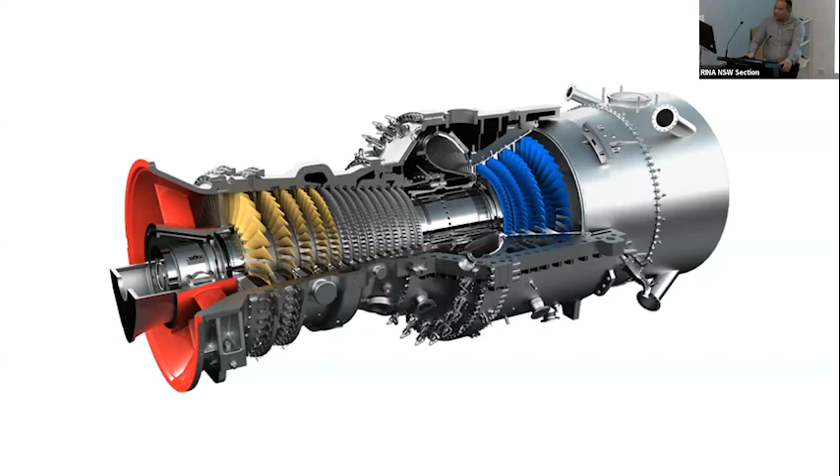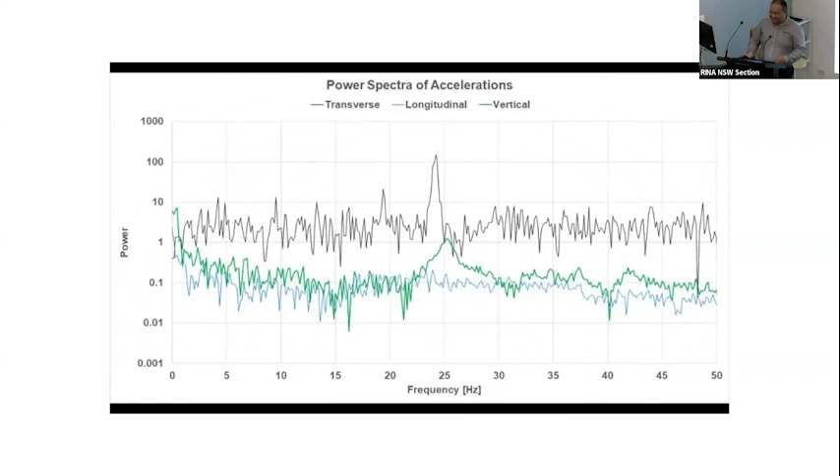Unfortunately, or fortunately as well, I had to come back to work. So I joined Baker and Provan, starting as a project engineer.

Now, put up your hands if you have heard of Baker and Provan before. Oh, you don't have to pretend, but more than half - that's good.

We identify ourselves as mainly a manufacturing company. We offer fabrication and CNC machining, and mechanical and hydraulic fitting and assembly.

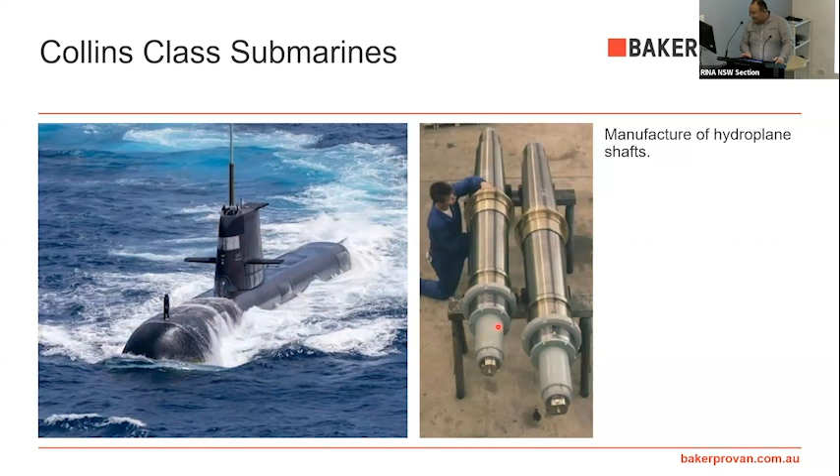Anyway, in the future we will keep supporting the fleet. For instance, the Hunter class program, we'll be doing that through partnerships with the Type 26 OEMs. We know the Hunter class is based on Type 26. Baker Provan will be heavily involved in the manufacturing of gantry cranes, deck cranes, doors, hatches, and scuttles, etc.

And besides manufacturing, we also carry out a lot of service work on the DDGs, the LSDs, and the AORs.

Now, tonight I'm going to present you with 3 examples from my day-to-day work and show you the kind of issues we come across. There are safety device pressure settings, a bolted connection, and some hydraulic pipe replacement.

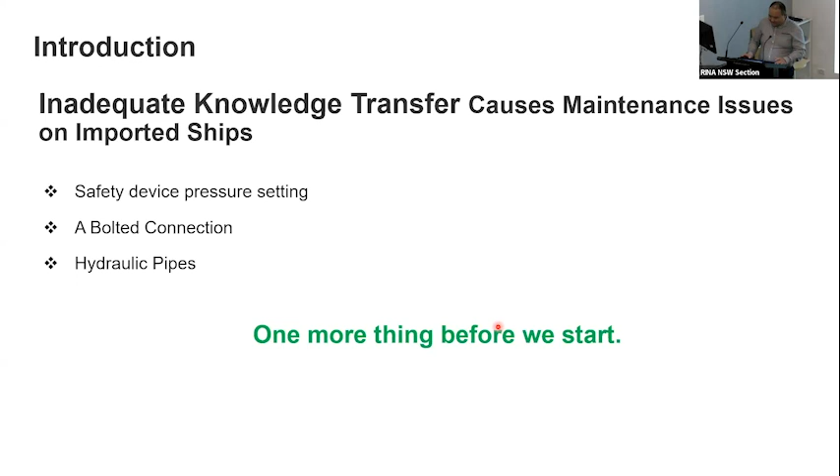But before that, there's one more thing I decided to add to this presentation, probably in the last couple of days. This is a phone app called Spectrum View, developed by Oxford Wave Research. Have you guys heard about that before?

The reason why I'd like to share this with you is because of a recent experience. This app can display a real-time spectrogram and a spectral analyzer view. I started using it when I was doing advanced vibration engineering.

So let me tell you the story. There are 3 recordings from my phone, from left to right, chronologically. If you look at each of the graphs, on the horizontal axis, that's time in seconds. The vertical axis is the frequency in hertz, and the color is the noise level in decibels. Red means it's loud, and blue means it's quiet.

Starting with the first one - I was doing a cold machine inspection, so nothing's running. Took up my phone and saw that. So I know there's a pump running, about 50 meters away, and I recognize this frequency being a multiple of that - you can see the dots. But that one looks rather odd to me, because I was not expecting another frequency just below that.

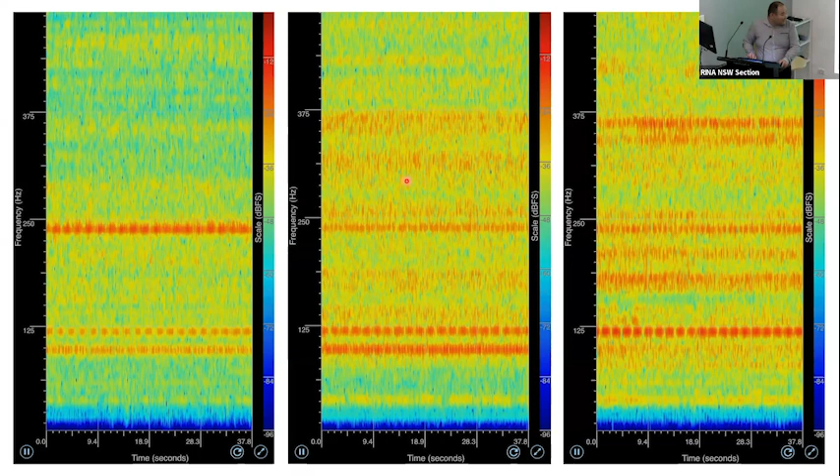So I walked towards the noise. When I hear the noise, I walk towards it. So that's the difference between 50 meters away and 5 meters away. As you can see, these get louder - the closer, the louder - so it's more red than this one. And also you can see these relatively higher pitch noises from 5 meters away that don't quite make their way to 50 meters away.

Obviously, that's a frequency that does exist. Then I walked even closer, went downstairs towards the pump, and discovered a cover plate with loose screws on it - so it's a loose plate. Once I had someone tighten up the plate, that frequency was gone.

It's so fascinating that with the help of sound, we're 50 meters away, out of sight, on a different level - I could see something's wrong, went there, and found that plate and tightened up the screws. That's why I'd like to share this experience with you. It's so easy, it's a free app, and so easy to have an extra dimension in our everyday work and discover problems that otherwise went hidden. Because just by listening at the start, my ear wouldn't really tell any difference, but the spectrogram does tell - there's some other frequencies there.

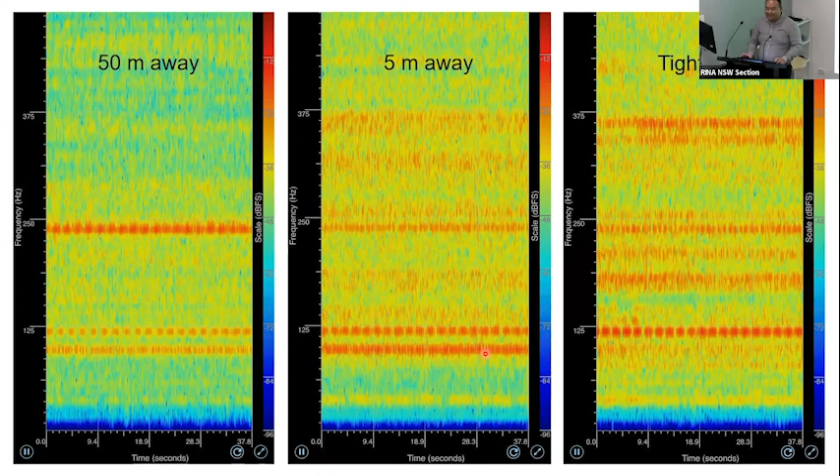Anyway, finally, let's get back to the topic. So first example - this is a typical hydraulic schematic for a winch. This here is a safety device. For simplicity of this presentation, let's disregard that pilot line and consider this being a direct acting relief valve. So it's something like that - it's got a little orifice there, closed by that poppet, and then pushed down by that spring.

As you can imagine, when pressure keeps building up here, it will overcome the spring and then release the pressure. So the further you wind down the knob, the larger the force from the spring and higher pressure required to overcome and relieve it. That's how you adjust the relief pressure.

So in this, let's say on the winch, you put 100 kilos on the hook and then somehow release the brake. The load would like to drop, so it would like to turn this motor and build up pressure here. These are hydraulic flows, sorry. So you can imagine when pressure is building up here, it will want to overcome that spring.

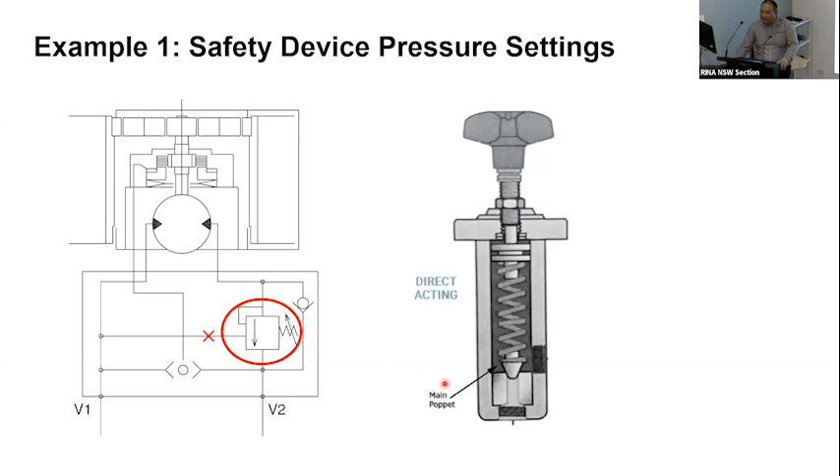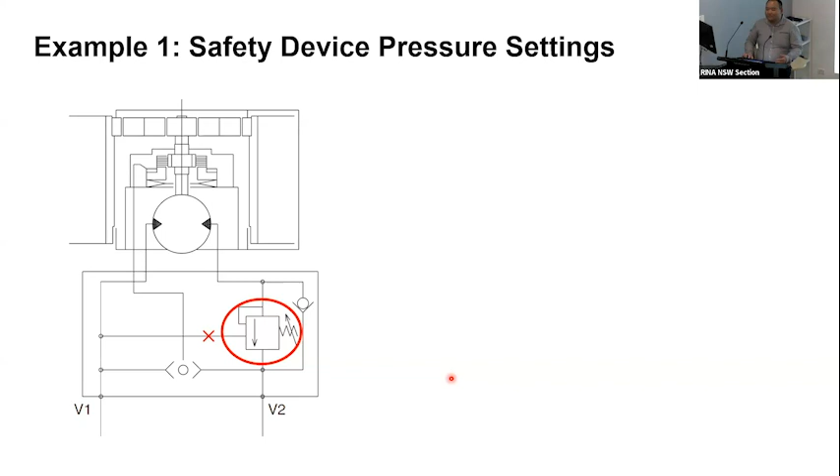So in this scenario, we were given this winch from the customer to overhaul. That's fine, we've been doing this for many years, we're quite familiar with that. But as we were finishing up, we realized we should look at the manufacturer's instructions on what pressure we should be setting for safe operation. And that's what they say on the manual.

For a moment, you would think you could read Italian.

This is the Italian manual's English equivalent: we're not going to tell you the pressure, so don't do it yourself. We are confident to clean everything and put it together, but without that piece of information, we're not confident it can be operated safely. This kind of information should have been passed on when they delivered the equipment, rather than us finding this out when we have to overhaul it. That's exactly what they wanted, I guess.

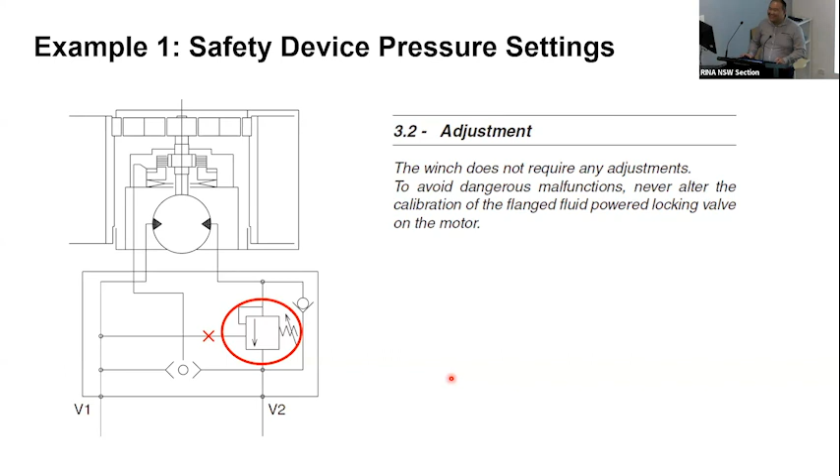Okay, now the second example. The first one is rather simple - we just need to make a phone call or write an email saying, hey, what's the pressure, can you please tell us? And most of the time they're quite helpful about that. So that's the maintenance manual - there's no data sheet, they don't tell the actual number, so we have to chase it up. But that was easy enough, from the good Italian folks.

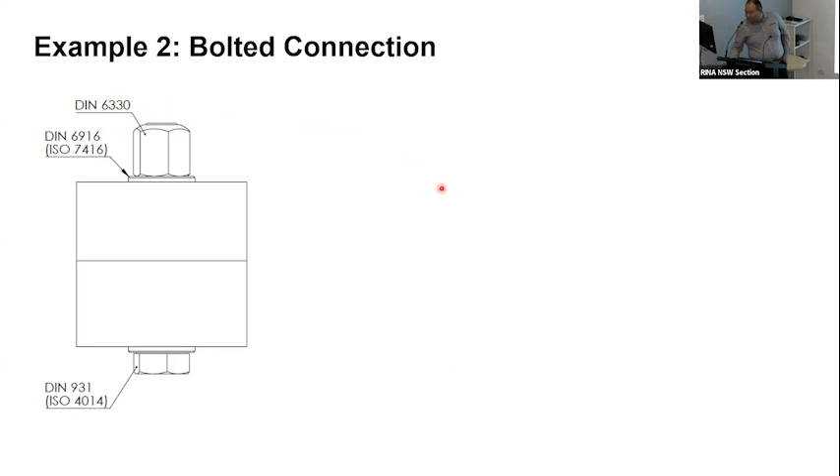There's another example. This is a bolted connection you find on the superstructure of a certain ship. They're just a regular bolted connection, torqued up to 1,500 Newton meters. The only difference is that on some of these bolts, there's a superstructure flange on a frame right up against it, but that's not a problem in this instance.

We found these bolts in real life to be rather corroded. So we reported that to the OEM, and obviously they recommended these to be replaced. So let's have a look at what the descriptions from the OEM say about these parts.

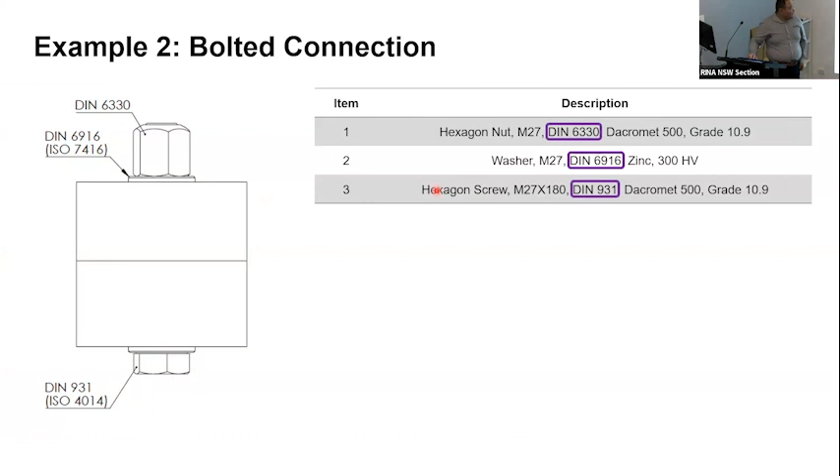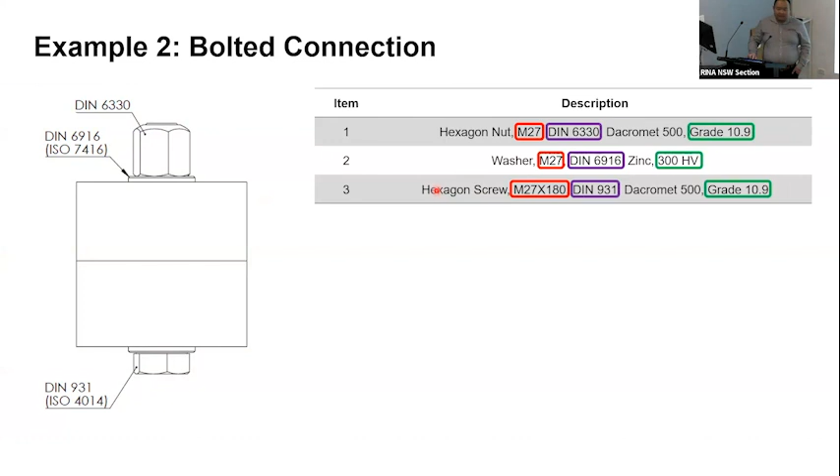Firstly, their relevant DIN standards tell us what they are. Their size is M27, not very common, but it should be okay. Grade 10.9, that's what you'd expect for structural bolting. And the coating is Dacromet 500 - essentially a zinc flaking process rated to 500 hours of saltwater spray. Now, the keywords - it appears we have enough information to identify what they are, what size they are, what coating there needs to be, and what grade they are. So it looks like we have all the information we need to replace these.

But if you look at the DIN 6330, that's not common - we don't use it here in Australia, or at least it's not what I've used. When we try to find it, it's very hard - we have to get it from Spain. That takes 8 weeks minimum, and with a very big price tag, because it has to be air freighted in.

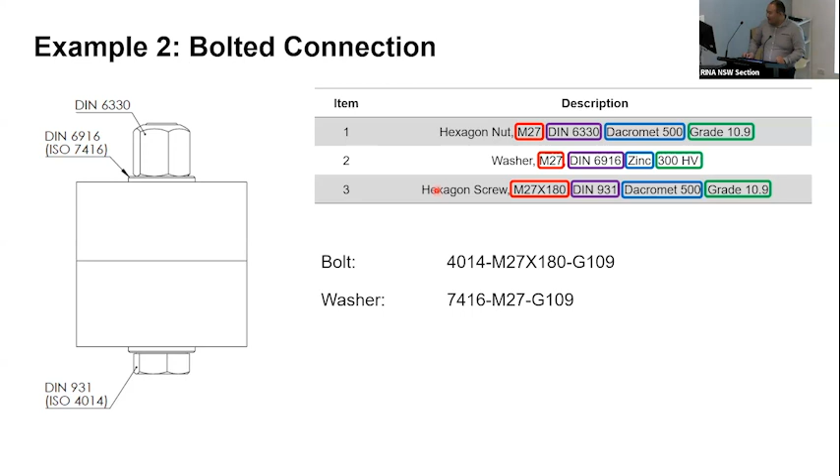But let's think about this. Let's do a comparison between a DIN 6330 and ISO 4032, which is the most common standard hex nut we find pretty much everywhere. The main difference you can see is the 6330 is thicker - that's about 1.5 D, whereas the 4032 is approximately 0.8 D, where D is the major diameter of the thread.

So let's see. According to ISO 898 Part 1 2013, the proof load for the bolt is 381 kilonewtons, and the proof load for the standard nut is 486.5 kilonewtons. So that means the weakest link here is the bolt. By using a thicker nut, it's not going to increase the load bearing capacity because it's limited by the bolt itself.

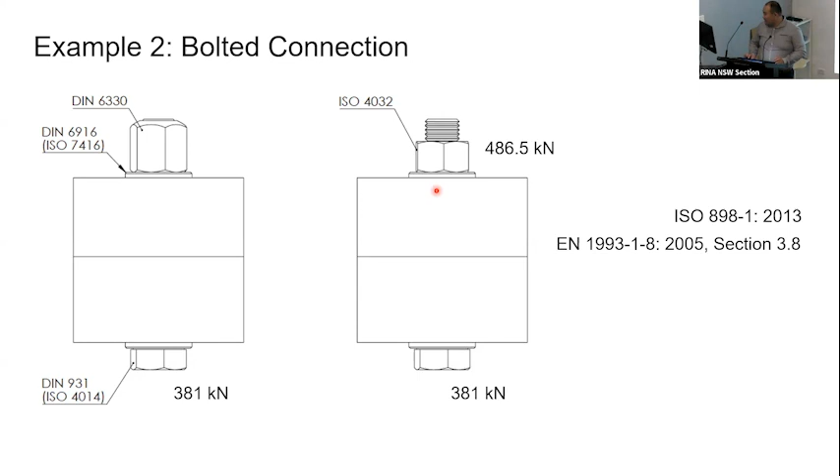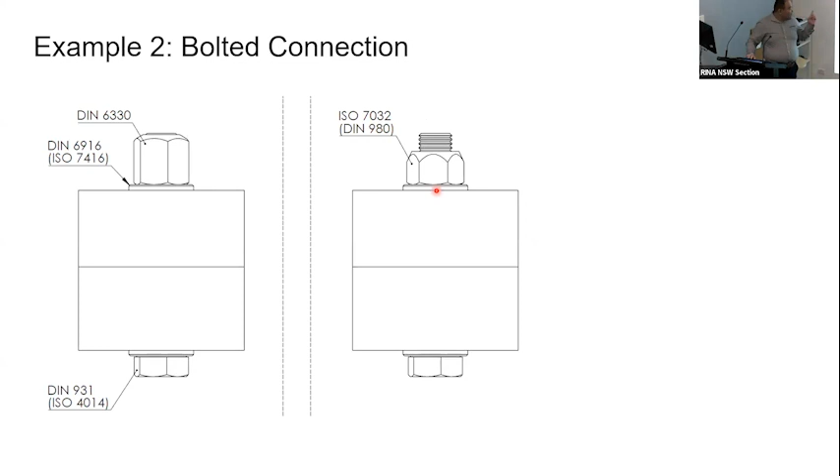So going back and forth a few times, they eventually approved our proposal to use the ISO 7032, which is widely used in Australia. We actually use it quite often for our jobs for Sydney trains. Other projects use it as well. In that context, it's known as the DIN 980.

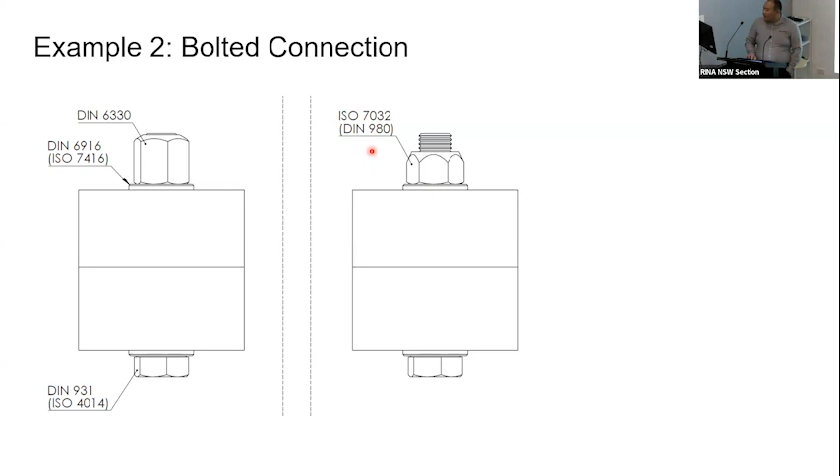If you're using the name ship, you then have to get an engineering change approval to change the design of the nut. Yes, so we do that through the OEM. We'd prefer getting their approval, but we have very good communication with them, so normally we can hold meetings, or if we send them an inquiry this arvo, we typically get a reply overnight. So there's no issue with that.

So what are the benefits? Since we can source them locally now, we reduce the lead time from more than 8 weeks to a week or two, and really reliably. Reduced cost too, because the airfare is probably $1,000.

Better performance, because the 6330 relies on more thread engagements, so you have more friction, whereas the 7032 has a little metal insert under there, and it's got a pressed thread on it, providing a much more robust locking mechanism.

And also there's a bonus - we can use shorter bolts. There used to be a thing called good engineering practice, which always used to state that you had 3 clear threads protruding from the nut - that's what you got there. I think if we do it to scale, we'll be saving about 10 millimeters of length. So we'd buy shorter bolts, which is probably cheaper too, and lighter, so the boat can go faster.

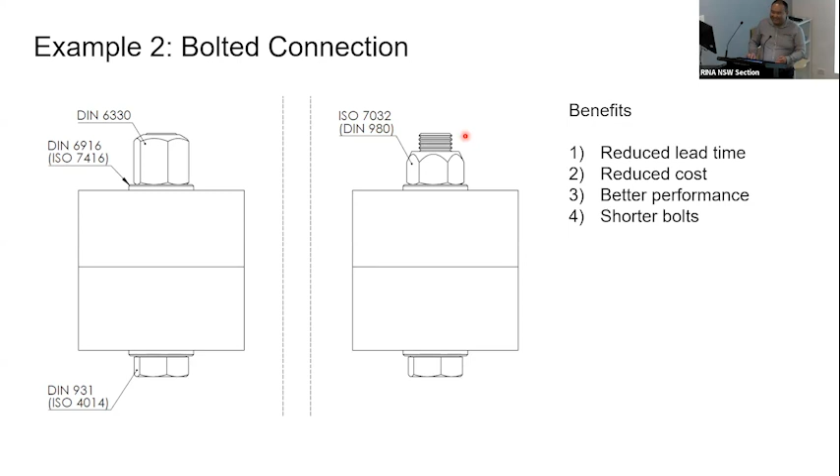Had we done this in the manufacturing process, we wouldn't have had to squeeze this last-minute engineering review and change into a very short maintenance period. That was the takeaway from that example.

Next one, hydraulic pipes. This was from one of my inspections - I had to climb up the ladder, have a look, and the wall thickness is about 4 millimeters on those, and the corrosion is more than 1 millimeter thick. So, not surprisingly, we have to make new pipes to replace them.

The new pipes must be produced by a Lloyd's certified mill with the rated pressure on the certificate. They must have equivalent material property and the same sizes.

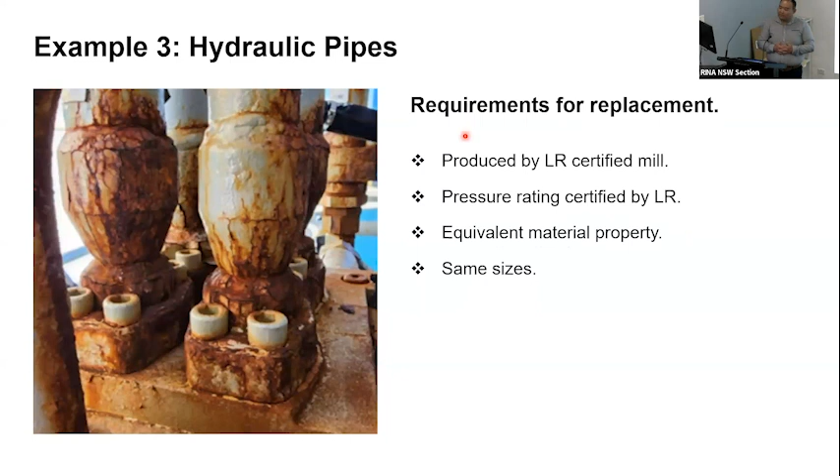So let's first have a look at the material. Not surprisingly, the material is nominated as E355 normalized - E stands for Europe. It's quite common in Europe, but in Australia we'd have a 350 grade or 250 grade, whereas in Europe they have steel like E355, E235, E215 for instance. In terms of chemical composition, they're very similar, with the E355 having slightly lower content of manganese, phosphorus, and sulfur. And when it comes to mechanical property, they're marginally bigger compared to the 350 grade we find in Australia.

As engineers, collectively, we are conservative. So we tend not to say, oh yeah, they look quite similar, so just use it. We have to do a proper analysis and verify that we can actually use it.

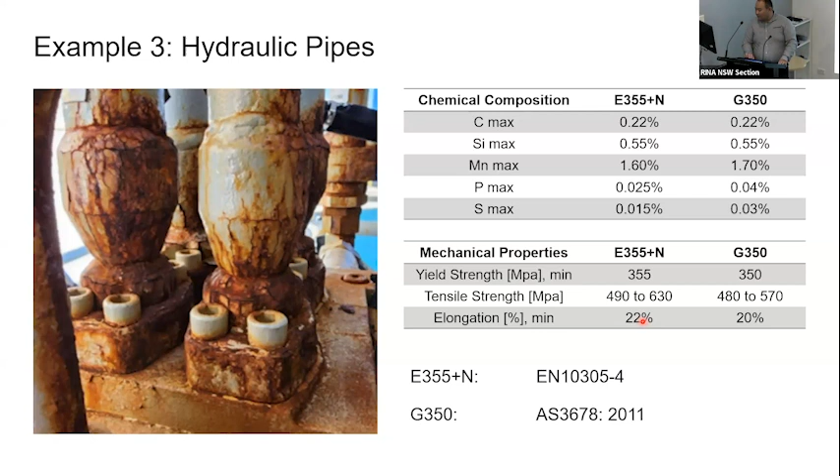So these are the pipes the OEMs selected. As you can see from there, they're metric pipes: OD, ID, flow rate at 5 meters per second, and their rated maximum working pressure. These two columns show you the working flow rate of that function and the working pressure.

These are found in the hydraulic schematic. As you can see, that one is 100 liters per minute, but the pipe is rated to 53. And that one is 360, the pipe is rated to 272.

And also another problem we have is, for historical reasons, we have more scheduled pipes here in Australia compared to metric pipes, what we found when we were trying to source pipes. So it's not that convenient.

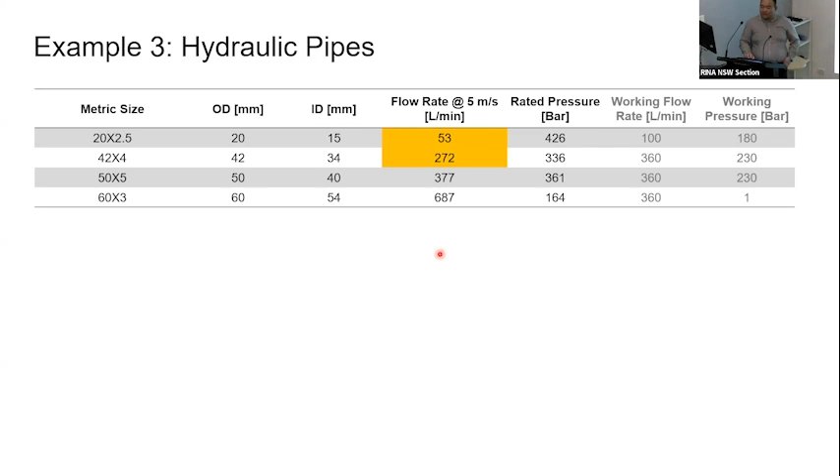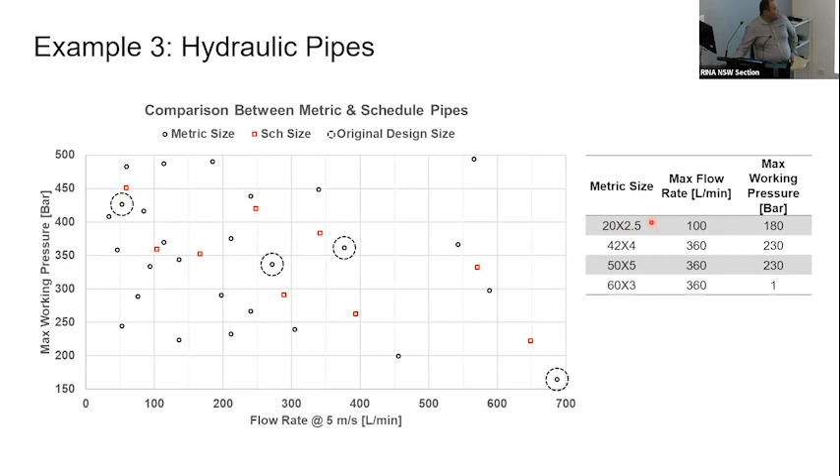So we can potentially use those two, the 25 by 2.5 and the 3/4 schedule 40, to substitute that 20 by 2.5.

And for the 42 by 4, the maximum flow rate is 360 liters per minute, so it's around there. The options are that one and that one, which is 50 by 6 and 1.5 inch schedule 80. But actually, in practice, you would rather use that one, the 50 by 5, because it's got adequate flow rate and adequate pressure.

And the last one, for the return, you have a 60 by 3 or 2-inch schedule 40. So these are the choices we would take if we were to design it, given those operating conditions, right?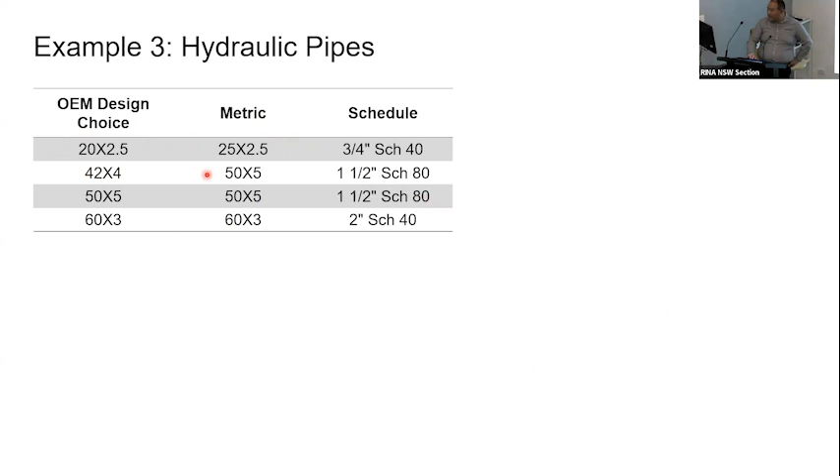Now, in order to carry on with the work properly, we would have to answer these questions. Can we use the Aussie 350 grade to substitute the Euro 355 grade? What is the design rationale? Instead of using 50 by 5, they use the 42 by 4, where 50 by 5 looks like the obvious choice.

And can we use schedule pipes to substitute the metric ones, because it's easier to get in Australia? But then considering if we use the 1.5 inch schedule 80 to replace the 50 by 5, we're reducing the flow rate by more than 10%.

And the next one, schedule 80, is pretty heavy wall thickness, isn't it? Yeah, because for these large pipes, the larger the pipe, the more wall thickness required to get the same pressure. We wouldn't really worry if it's a small pipe.

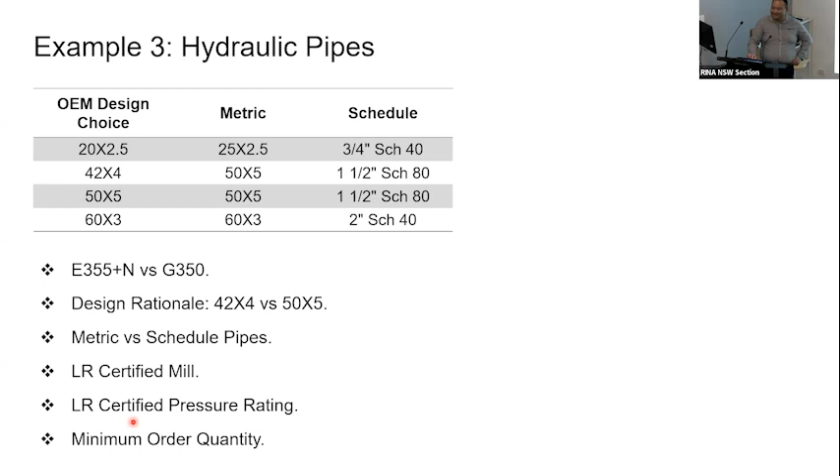And then practically, we need to have those manufactured by a Lloyd's certified mill with pressure ratings on the certificate, and also a minimum order quantity. That's a very practical concern, because a lot of the mills we went to in France, they say we can supply them 300 meters per size minimum, whereas the ship only requires 3 meters.

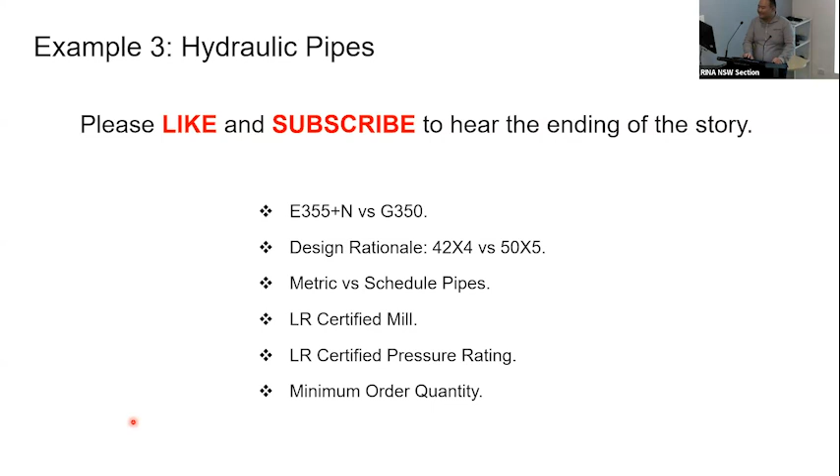In summary, today I presented 3 examples. One is about pressure settings on a safety device. One is regarding the local substitution for the DIN 6330 nuts. And the last one is supplying of metric pipes.

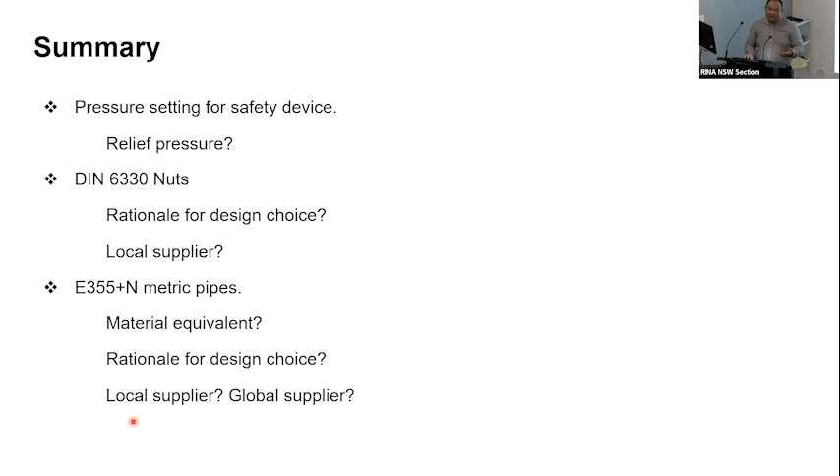And these are issues we came across because of inadequate knowledge transfer in the first place, causing us to do extra work to carry on with the job. If you think about it, the material selection or certification, the rationale of certain design choices, and localization - these are all the questions. It would be so much better if they're answered even before the construction began.

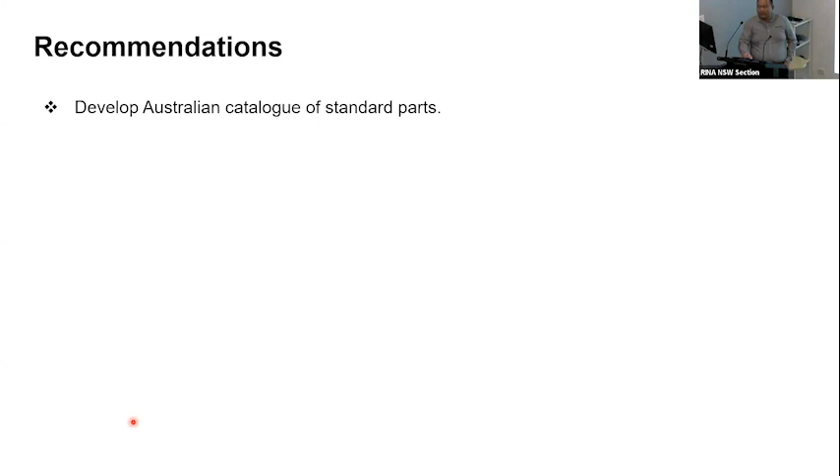And that brings us to the recommendations. I recommend, for the industry and technical community, to come up with a process when we import ships and other equipment from overseas. Let's say, just for argument's sake, these processes should start with developing an Australian catalog for standard parts. For instance, these examples from the European OEMs, they always nominate the relevant standards on their descriptions.

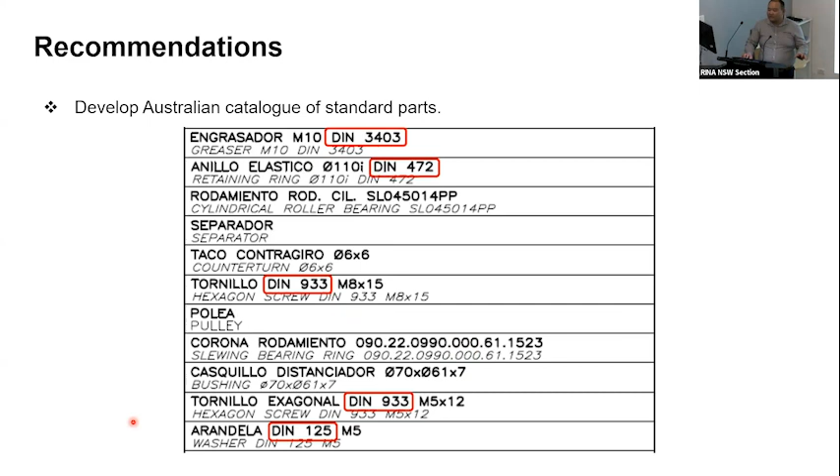So they choose these parts in their own catalog. They don't go out of the catalog. And we can happily build ourselves based on well-established catalogs on the ISO standards or DIN standards or UNI. And also we should encourage our own industry to select these parts when they do design work locally. And when we import equipment or ships from overseas, we should require the OEMs to supply parts from that catalog where possible.

OEMs charge you more than design? Potentially, but otherwise the cost will just flow down in the future and it will be repeated. That's a waste of our own economy when we have to repeat the same process over and over again, whereas we could have done it right the first time, and then we can just do it locally. Because it's all about what we always talk about: our sovereign capability. So that's all part of it. We can't rely on overseas suppliers for simple things.

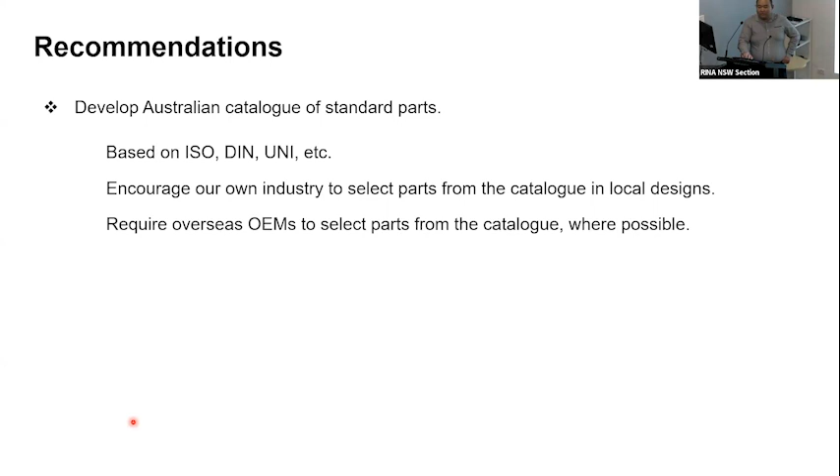Secondly, adopt a common standard for hydraulic connections. That also becomes an issue because of historical reasons - we have various systems in parallel in Australia. We would definitely recommend the metric system over those other established standards, because the majority of the world's industry is metric, with the exception of the United States, which only accounts for about 18% of manufacturing output. Besides, the United States itself officially became a metric country in 1988. It's just taking its time to transition out of the legacy.

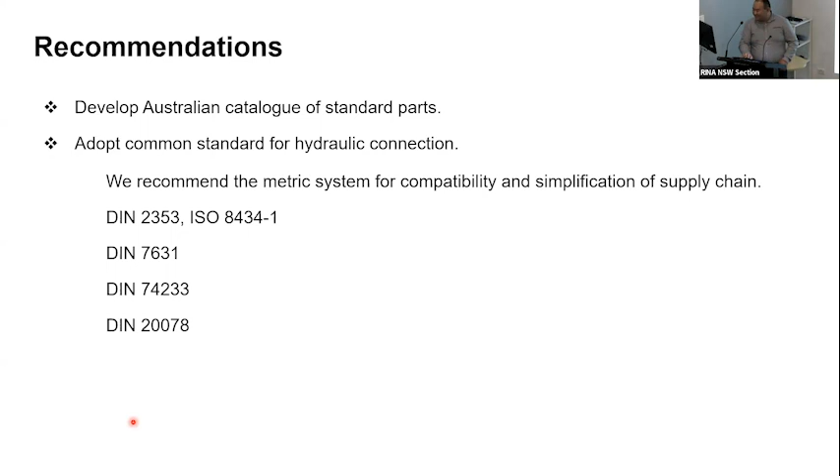And then develop a manual / checklist for knowledge transfer. Every time when we have this equipment coming in, we appoint a knowledge transfer engineer who should be responsible for making sure the key technical parameters are recorded, the design rationales are all documented, and the detailed maintenance instructions have been developed.

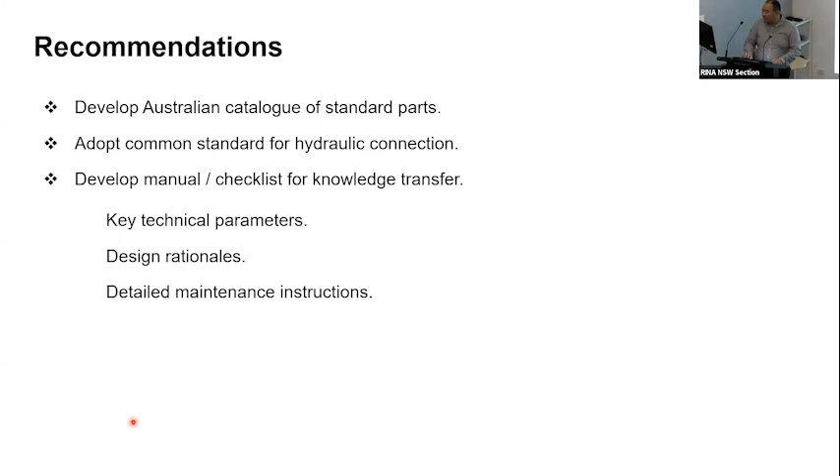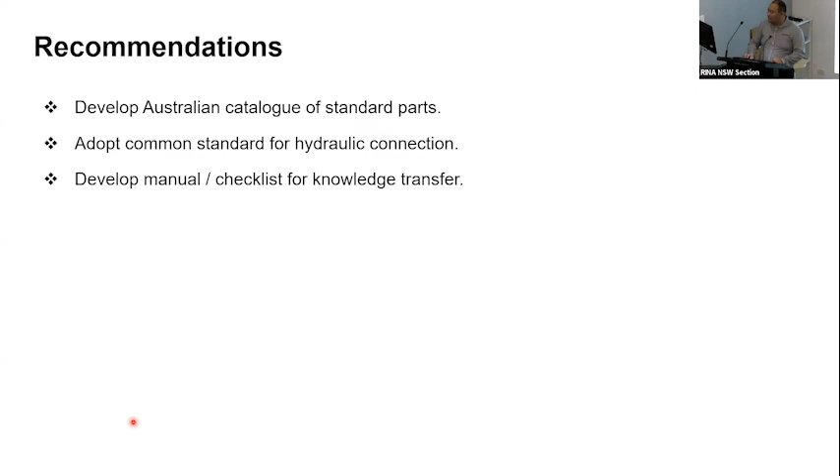And this is such a big project that it's not to be done by an individual - it has to be done with collaboration across the industry and the technical community. As I always say, I'm only here to plant the seed, and we all grow the tree together.